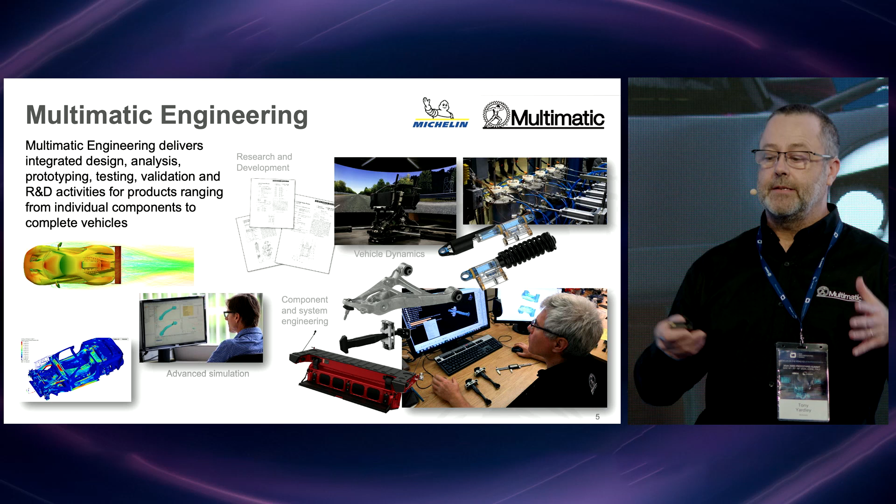Multimatic, just a brief introduction. The company is based in Toronto, Canada. We're a medium-sized company that is a tier 1 supplier to many manufacturers throughout the industry. That's the business base, and then Michael, myself, Behzad, we work in Multimatic engineering, which really facilitates the development of our products.

We tend to be very focused on the performance vehicle side, so we'll be talking specifically about high-performance vehicle in this presentation. But this section of Multimatic specializes in damper technology, active and adaptive dampers, which have been released into production quite recently.

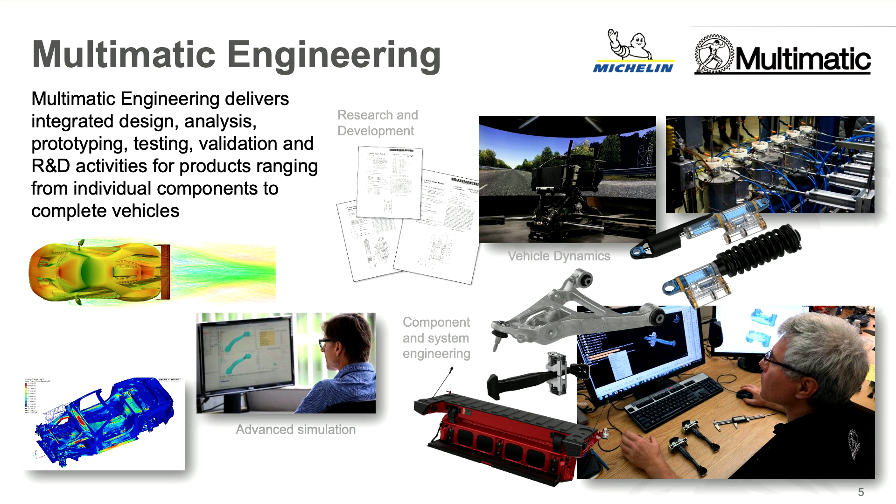So in terms of the project scope, we're going to focus on one vehicle, which Michael will detail. But we take, with Michelin's integral involvement, one of their highest performing road tires, and with them develop it specifically in a bespoke manner for the Mustang GTD supercar, I guess, would be the best way to describe it.

Then we're going to show how we used Cosin's FTire to predict some of the critical accelerations and forces going into the body structure that's going to be necessary in our ability to evaluate secondary ride and NVH. We'll detail how that FTire model is populated, and then on the bottom row, we'll be looking at how the real vehicle was instrumented so that we could validate this process.

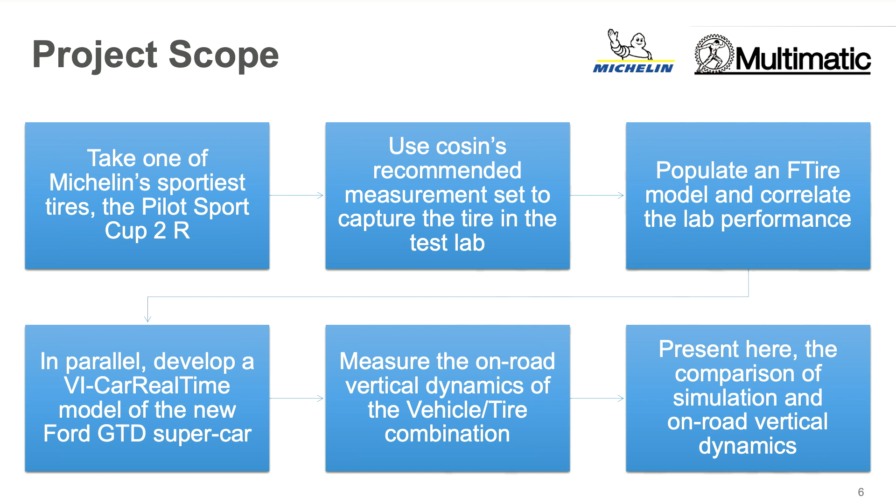We'll go on to essentially present the key results. So without my further waffling, I'll continue.

So I'm not sure FTire really needs that much introduction. I think most people will be familiar with it. But in comparison to a single point follower tire model, which is on the left-hand side of the screen, it has a distributed contact patch with a structural belt model. The important thing for us is that it runs in real time on the DIM 250 simulator that we have in Novi, Michigan.

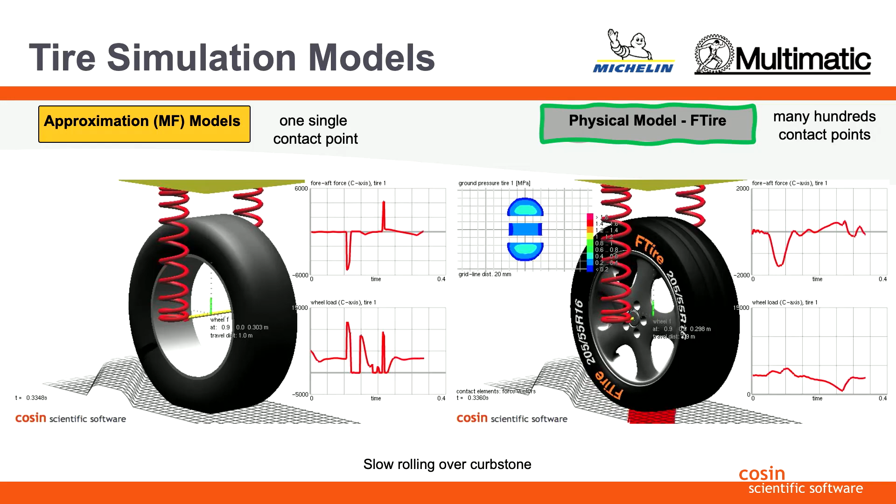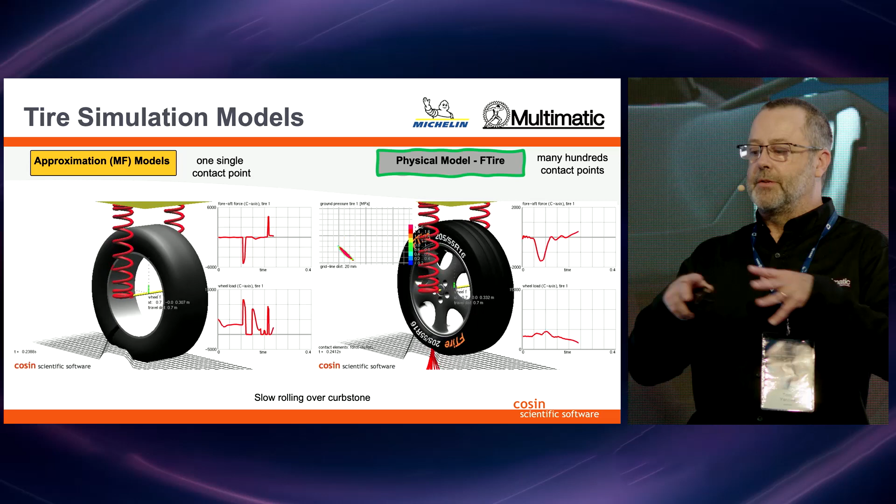What you see here in the presentation is a slide that I essentially stole from Cosin. It's their slide. But the way that the point follower tire on the left, the 4 spikes as it goes over the sharp object, is unrealistic. FTire models the way that the tire envelops the different contours of the road.

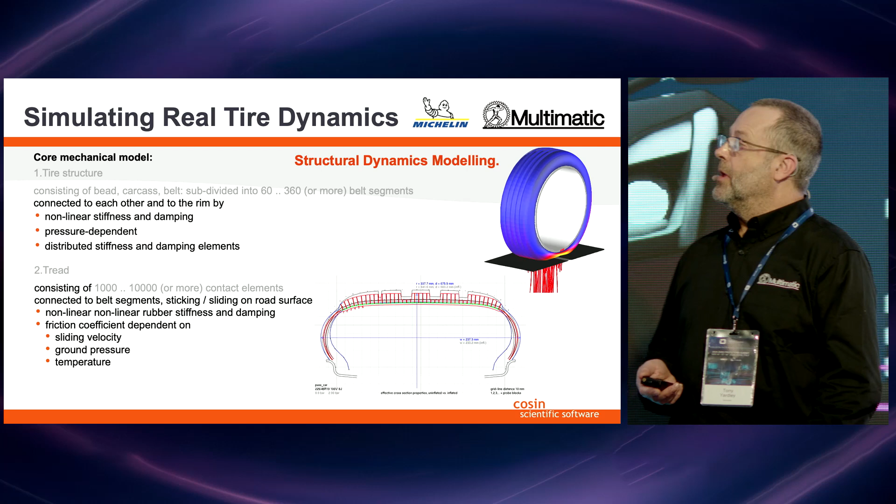Bit more detail about FTire. When we're running FTire in real time, we essentially break the tire down into a series of smaller chunks. We run at the lower end of the segment count. I think it was 60 segments around the belt. And ideally, we'd like to run more. As the computing improves, we would run more and get higher fidelity, and we'll see where we are actually trading off a little bit of NVH performance.

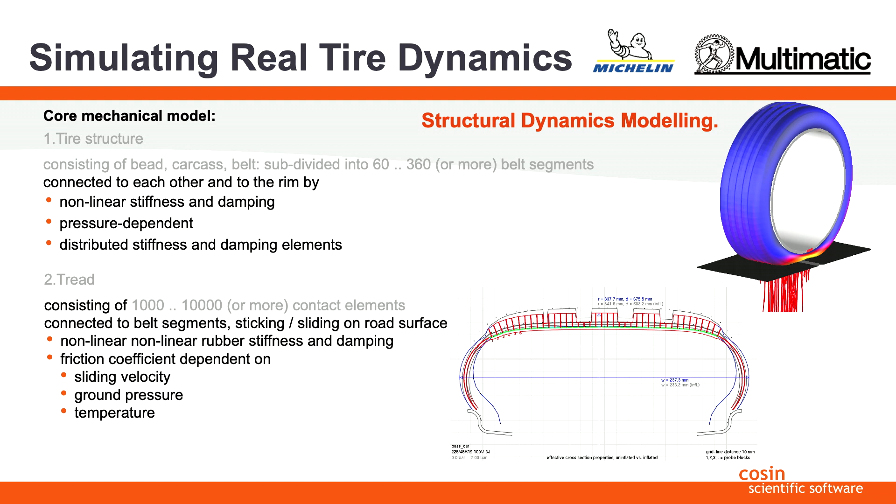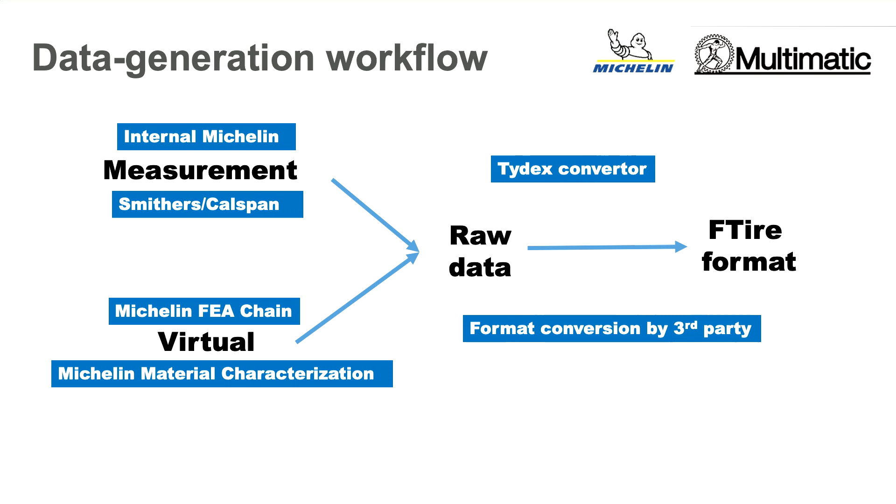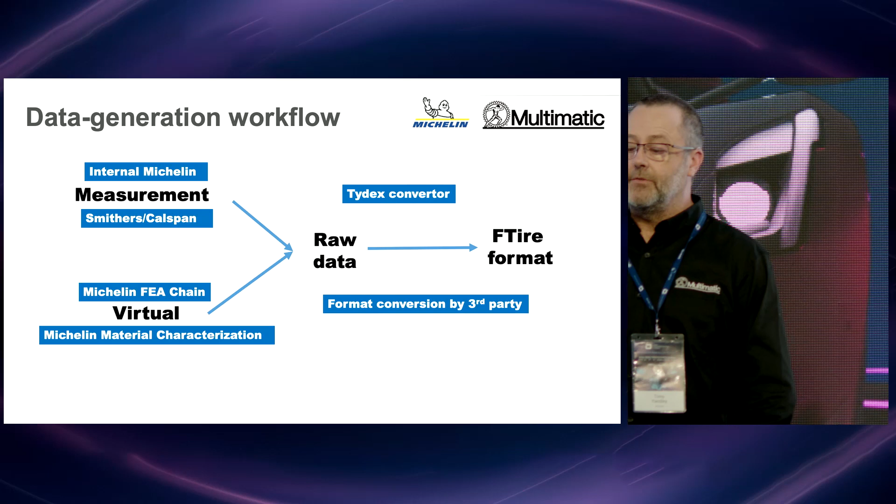The process that Michelin went through, it's kind of interesting. Cosin specify how to characterize and populate their model. So there's basically a series of in-lab measurements of the tire, and in addition an FEA structural model, that comes together into one single FTire format model that can be used for many things. One of the advantages of FTire is that you have a single model and it is applicable in many different situations. We're only using a fraction of its potential in this presentation.

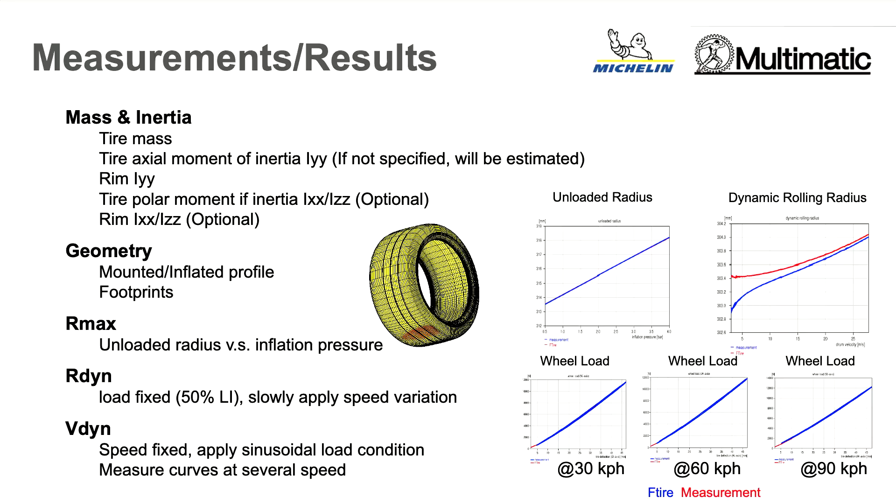The one plot where it doesn't match, Gary told me that's generic data from the brochure. He didn't have that plot available. So that one is the one that looks like it doesn't correlate very well, and it's because it's not real data.

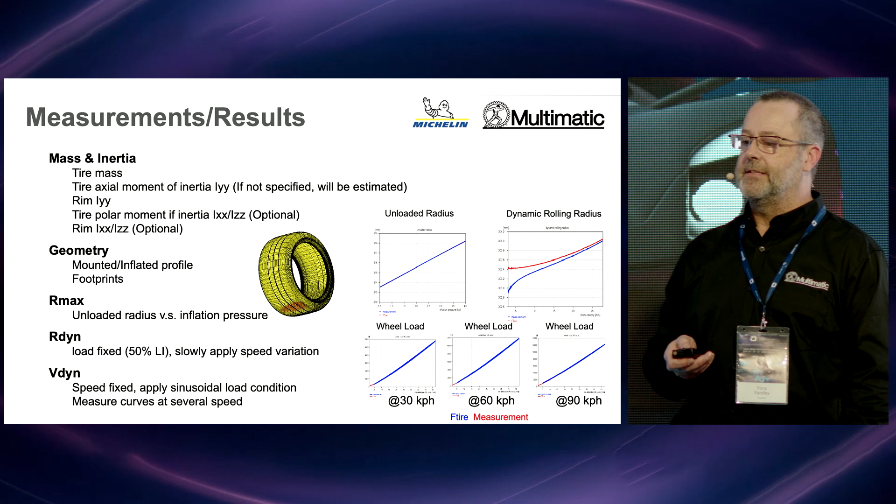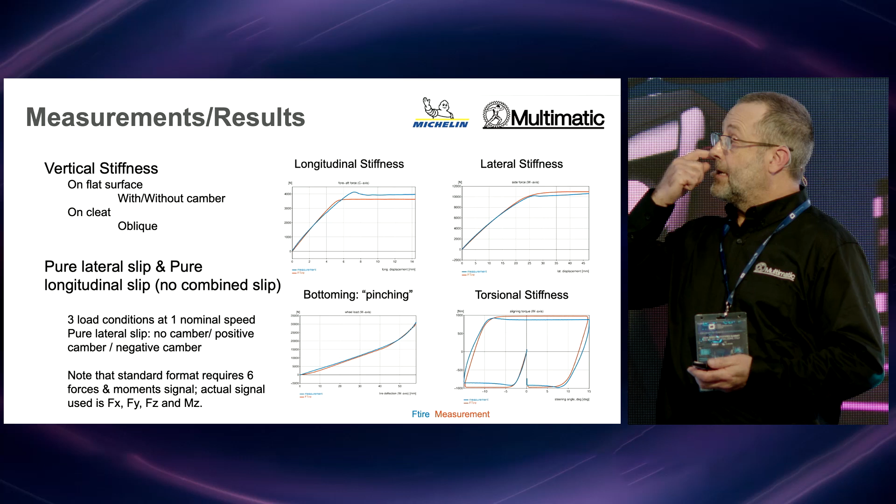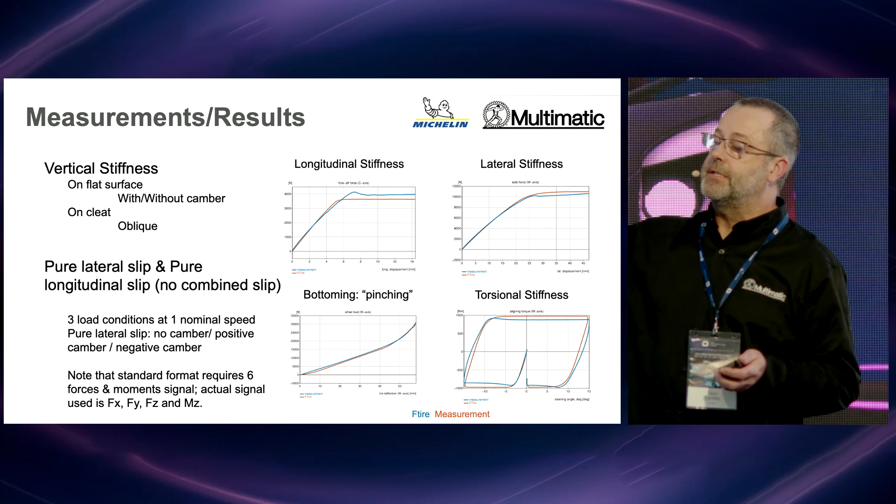Getting on to the more dynamic events, using a belt with a cleat, the tire rolls over, and from that, a longitudinal stiffness, and also by skewing the tire, a lateral stiffness of the tire is modeled. And here, again, the comparison: blue is measured, and red is the FTire model. I think the fit is, I'd say, a work in progress.

The bottom left plot is a vertical stiffness as it pinches against the rim on a very high load. And then the bottom right plot is from a static steering test, showing a significant hysteresis loop that is reasonably well reproduced.

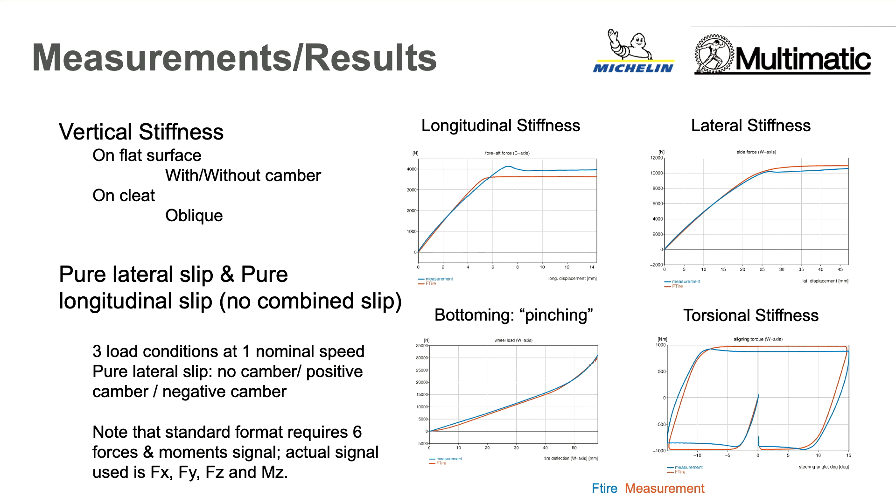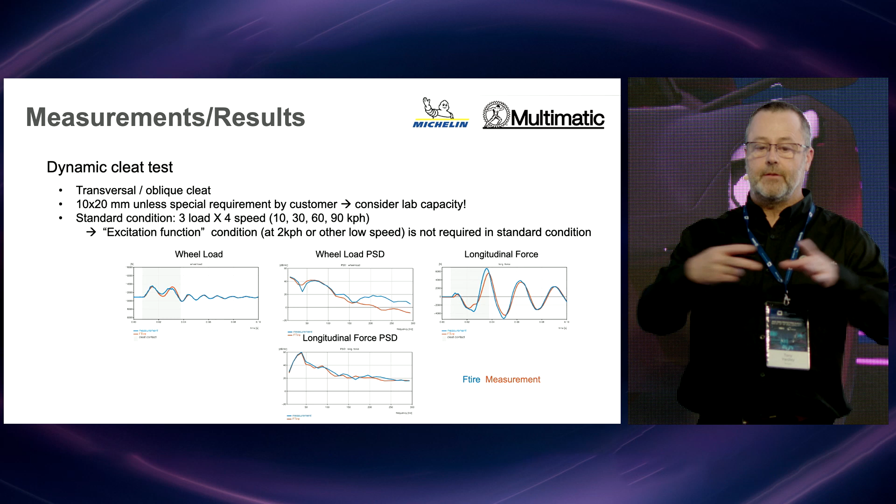Probably the most crucial characteristics for us are the transient vertical responses of the tire. And again, this is done by driving over a cleat object. Let me explain some of the plots. The gray section is where the tire is actually in contact with the cleat. And then, again, the blue is measured. The red is the FTire model. Far left is the vertical load.

In the middle top is the PSD of that vertical load characteristic, so looking at it across the frequency range. And then far right is the longitudinal force, again, as it goes over the cleat. Interestingly, I was surprised how long the longitudinal force still fluctuates after you've gone over the cleat. That was kind of surprising to me. And then lower down in the bottom, we have the longitudinal force PSD.

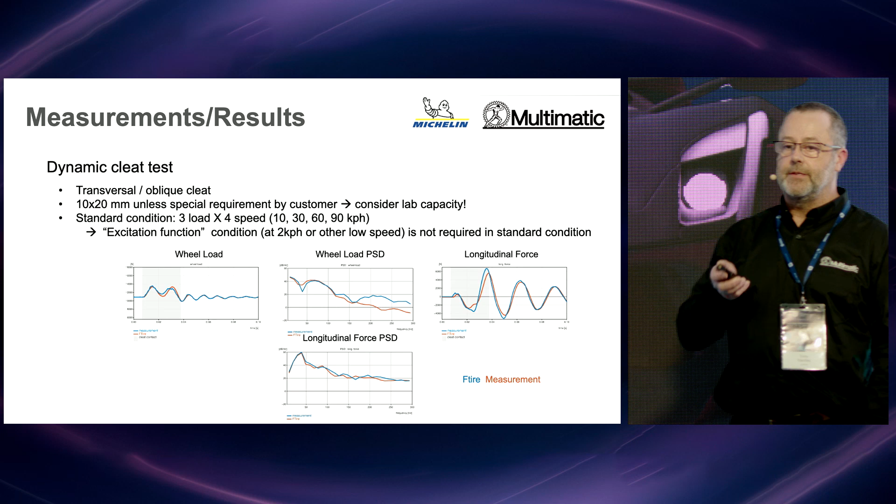The one interesting thing to note here is that in the top middle plot, the scale is really hard to read, and I apologize for that. These were taken straight from a printed report. But the blue and the red match reasonably well up to 150 hertz and then start to diverge. And that divergence is, for our presentation, actually outside the range. But for applications such as Charlie's and Bentley's, it's going to be crucial as well.

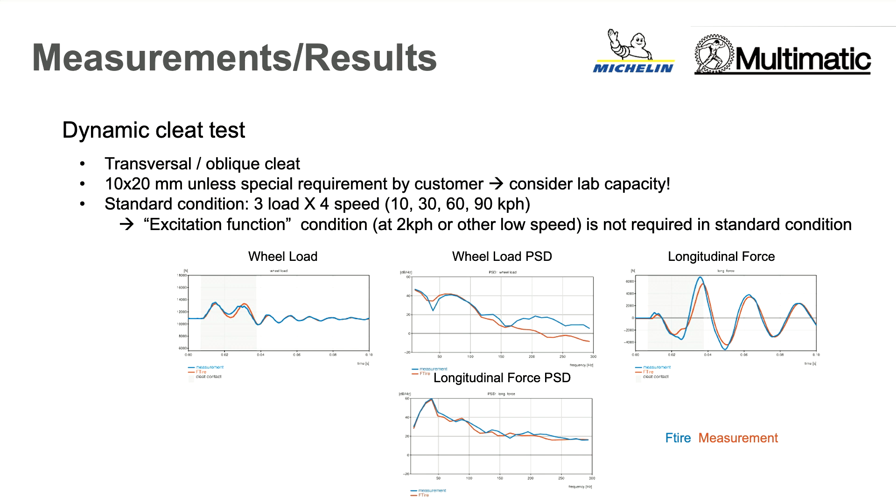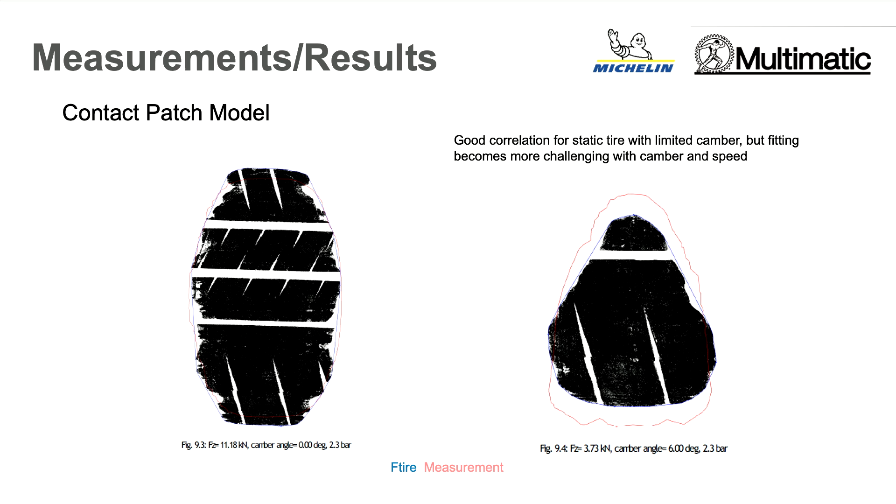The contact patch is specifically modeled with FTire, and the model fit, it's actually quite hard to see the outlines. The black is the actual measured contact patch, and then blue and red is again measured and FTire. The blue basically outlines the black area, and then you may be able to see the red.

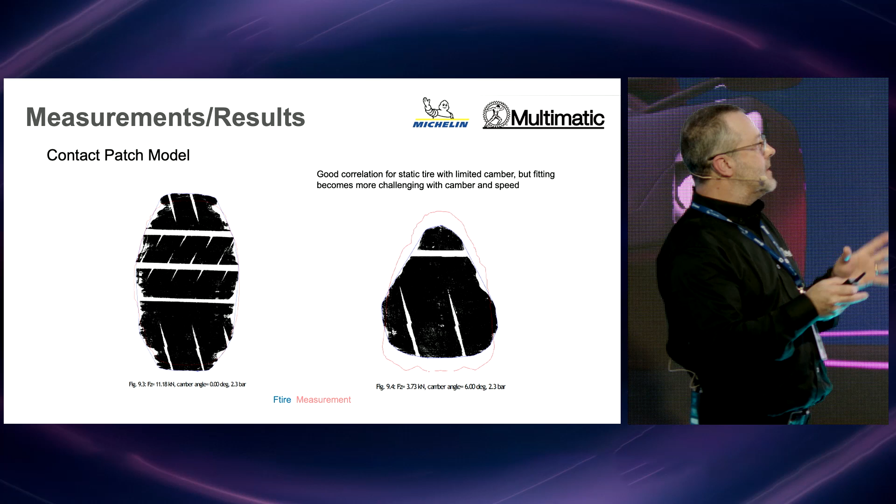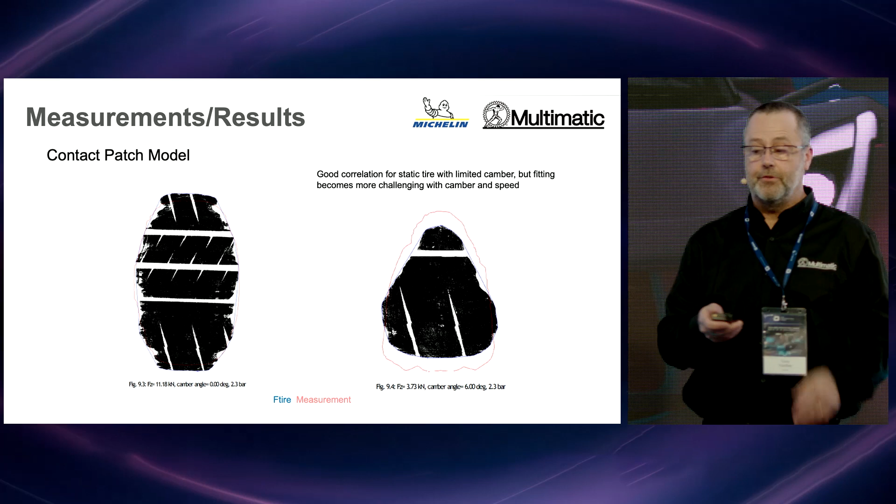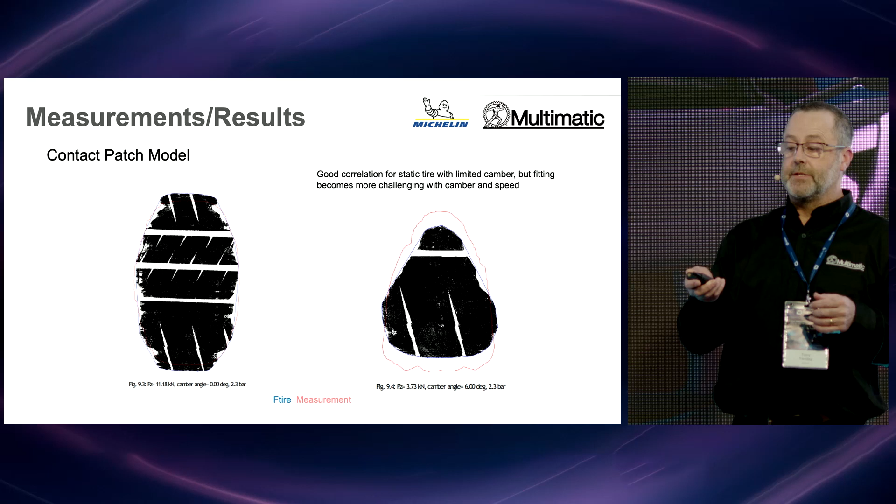The basic picture here was that at low speed, the match is really very good, and then as the speed increases, the difficulty of matching that contact patch increases considerably, because the time that the contact patch is actually touching the ground is very short. And that relates back to our 60 segments in the belt. If we could have more segments, we would be able to reproduce it to a higher speed.

And then probably near and dear to driving enthusiasts' hearts is the lateral force and aligning moment characteristics that affect on-center steering and performance driving. Here we see good side force reproduction, but in the middle plot, the aligning torque is significantly lower in the FTire model than we see in the measured data. Again, blue is measured and red is the FTire model.

We understand that this was a direct trade-off between matching the NVH characteristics and being able to develop the full aligning torque. I wasn't involved in that process directly, but I know Benny, sat over on my left, whose input we greatly appreciate, would be able to discuss those at length, I think.

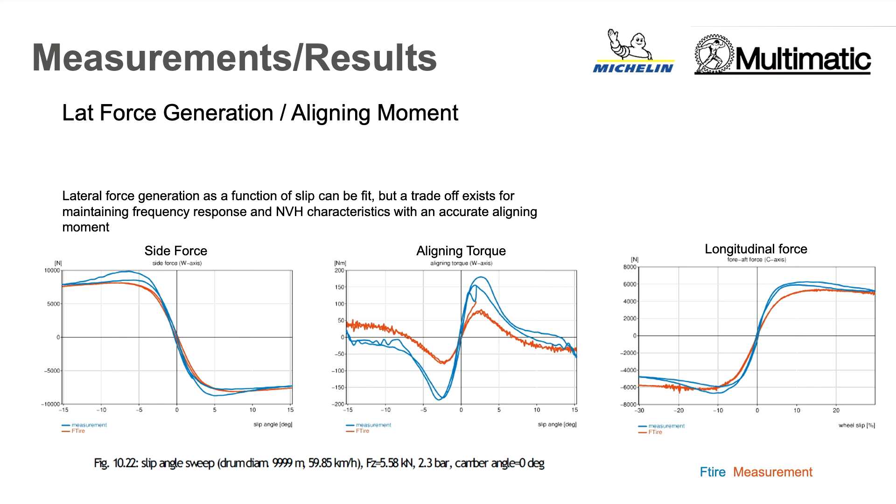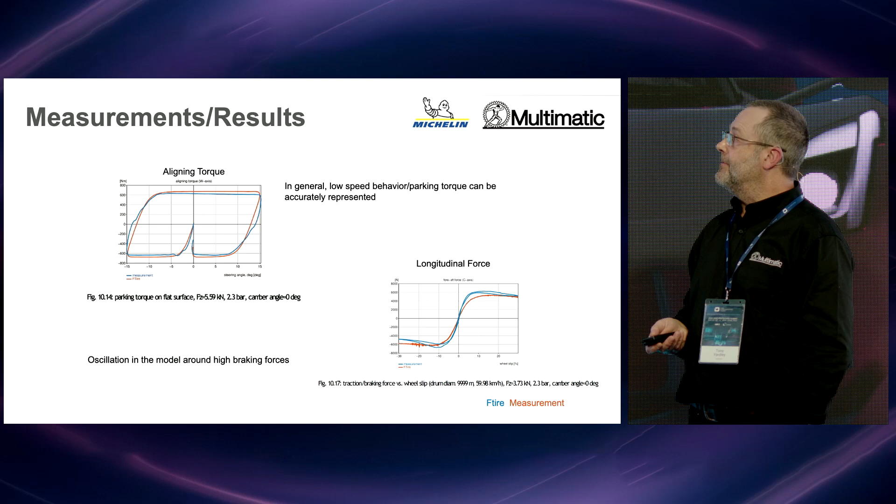And then we've basically seen the aligning torque during steer on the top left, and the longitudinal force is also a pretty good match. What's the comment there? Oscillation in the model around high braking forces. We did see some oscillation, again, kind of in the contact patch behavior around that frequency. So that is an area that we'd like to refine. We probably need more compute capacity to do that.

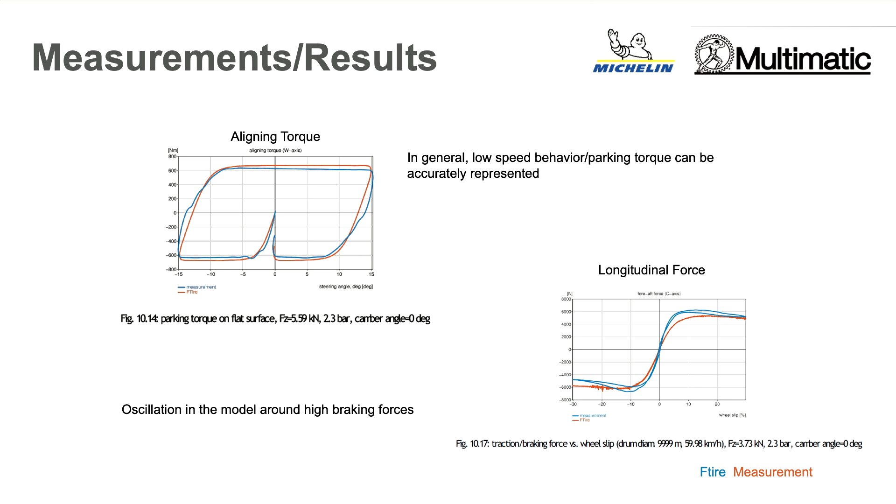I'm going to hand over to Michael now, and he will detail some of the full vehicle information.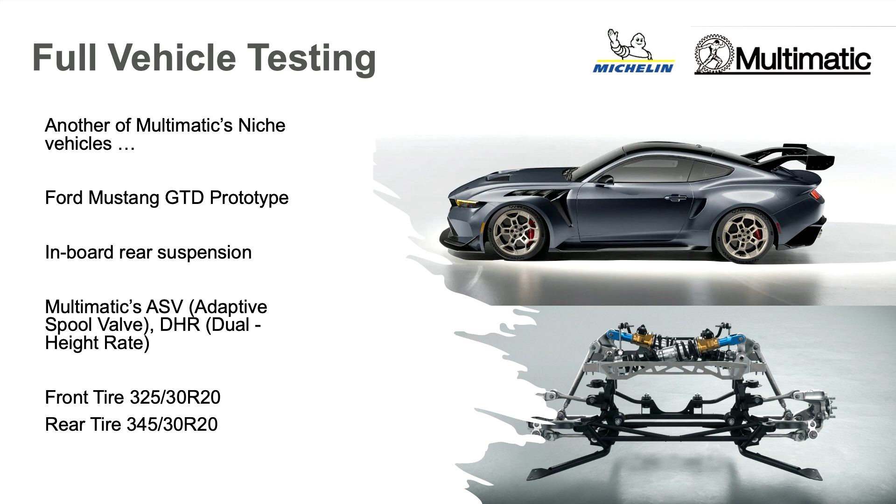Yep, so this is a slightly more exciting topic. As you can see, this is the car we're testing this all on. It's a Ford GT prototype, or Ford GTD prototype. One of the big complex parts is the inboard rear suspension, which added a lot of pre-processing and post-processing to all of the data. It's also equipped with Multimatic's ASV and DHR system, dual height rate and adaptive spool valve. In addition to that, it has absolutely monstrous tires with a 325 front and a 345 rear.

Those tires are Pilot Sport Cup 2Rs, as we were talking about before, kind of the best in class for on-road performance, but also on the racetrack. Very good, very sticky.

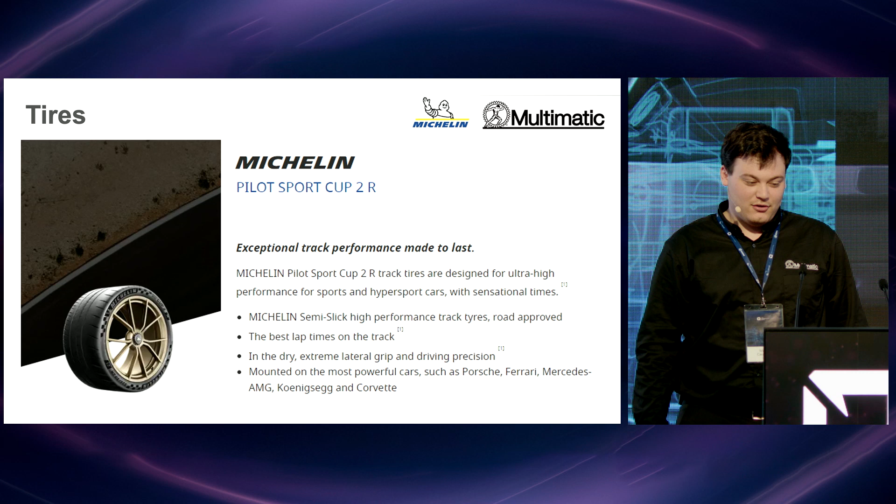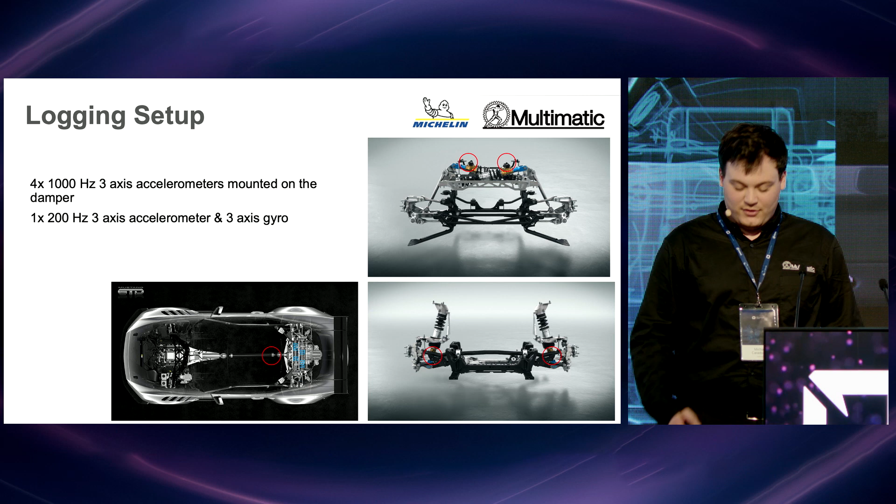So how we set up the loggers. Each damper had a 1,000 hertz three-axis accelerometer mounted straight to the damper, which on the rear is not in line with the hub, so that took a little bit of post-processing to fix. And there was also a 200 hertz three-axis accelerometer mounted basically right behind the center console, which is also a gyro.

So you might be wondering, what kind of road are we driving this on virtually, and the digital twin in real life? So it's a Michigan ride road. It's normally a really bad Michigan road. Has a lot of big concrete patches.

They create a lot of secondary shake. As you can see here, we've modeled it twice: once as a road mesh, once as a grid mesh. It's a little hard to see, but the grid mesh is a much finer density, 1 centimeter mesh spacing, which compared to a classic road mesh being essentially ten times that, is very high density, and that would more accurately reproduce the shake that we were experiencing in real life.

This is all generated from a point cloud scan, as you can see on the left here, and the location of the road, and also some close-ups of the sections that create a lot of the shake. It's kind of the buckling of the concrete slabs that create a lot of those really aggressive shake motions.

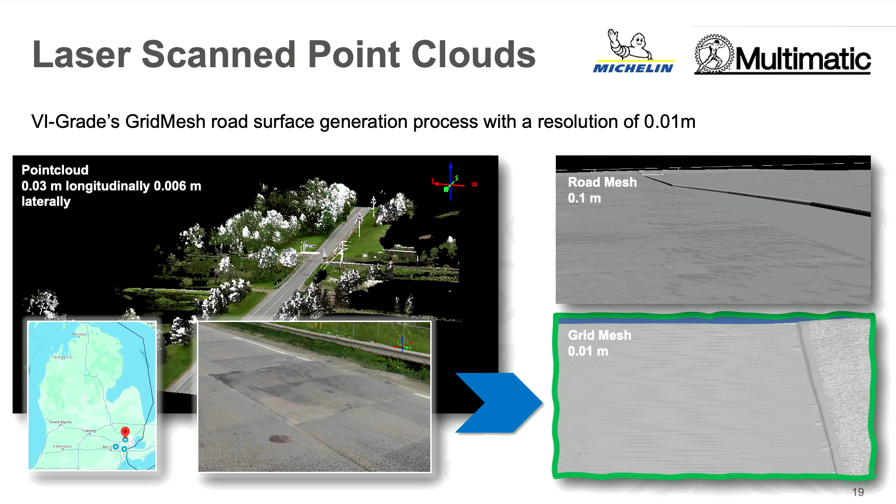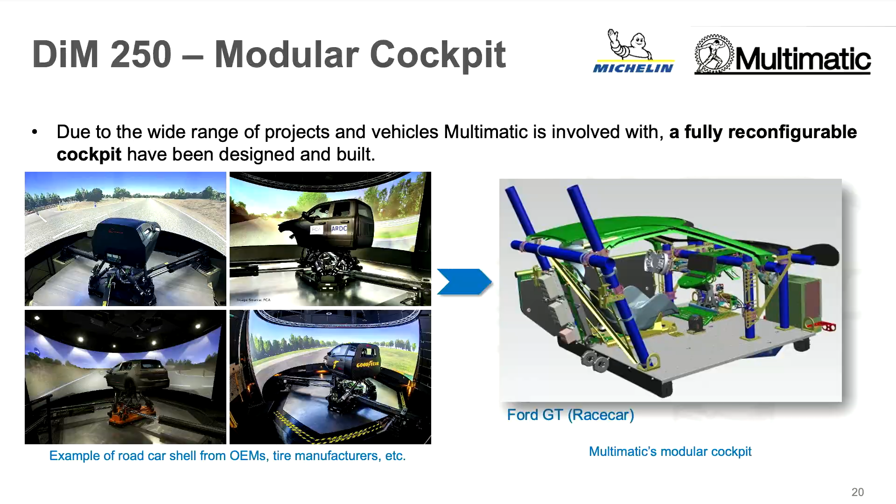So our cockpit, as you can see, and as you may know, a lot of the VI-grade simulators have cut car cockpits. Well, with our needs being to switch between a Mercedes C200 to a Ford GT to a Ford GTD, we can't just have a cut car because we'd be swapping cockpits all the time. So we have a fully modular cockpit.

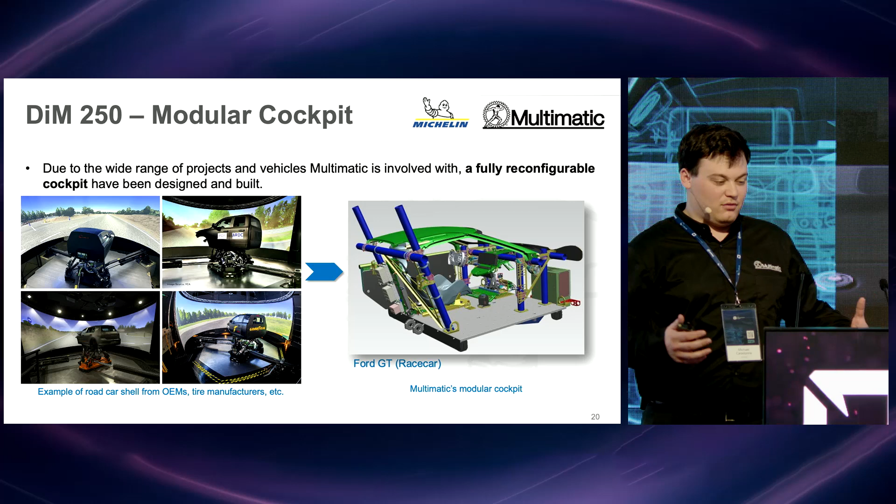Right now it's set up in the Ford GT Mark II configuration, but within 2 or 3 hours we can switch that to a C200 or some LMP2 car otherwise, which has been a very big step for us to be able to include all of our potential development opportunities.

So to run this real time, it was a little bit of a challenge for us. Here's a little bit of our computer specifications. So the biggest addition to running it real time was to have one core dedicated per tire. Nothing else on that core. Each core has its own tire.

And then some FTire settings pointed out by Cosin, run it in real-time mode. And then we ended up reducing the number of tire states from 30 to 15. That step was the final straw in being able to run it real-time. So I'll hand it back over to Tony to talk through some of the results.

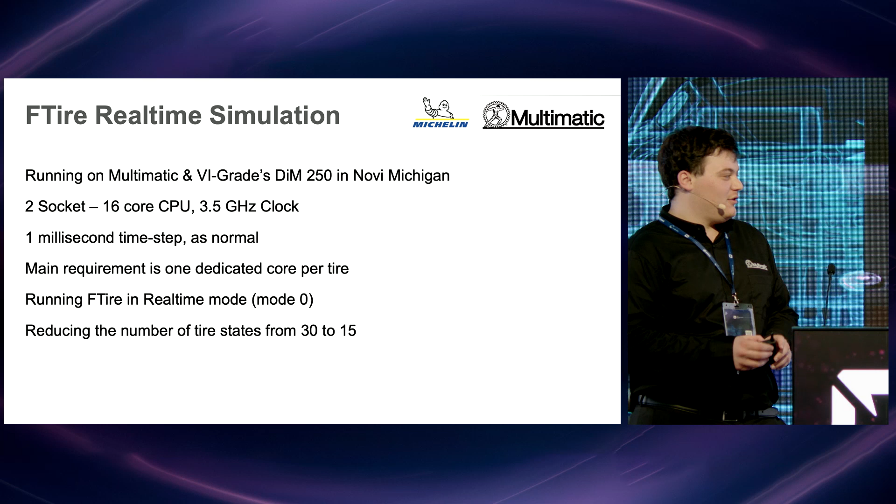Yep, thank you. So really just to close out, I've got 2 more slides. I am going to go through them in some detail. So I hope you're all brushed up on your frequency domain analysis. A show of hands, everybody good?

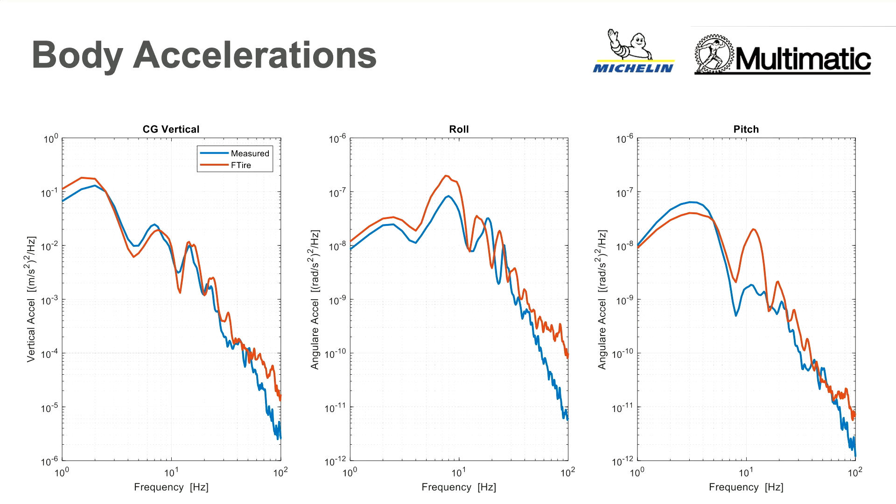is interesting. And the last plot on the right is vehicle pitch, so front to rear rotational accelerations. The one place where it really significantly diverges is right around 10 hertz, right in the center of the plot. That's a significant deviation, and we have to chase that one down. It's a bit too low for it to be flexibility in the mounting of the IMU. I tend to suspect something to do with phasing of the wheel hop modes, because they're right around 10 hertz.

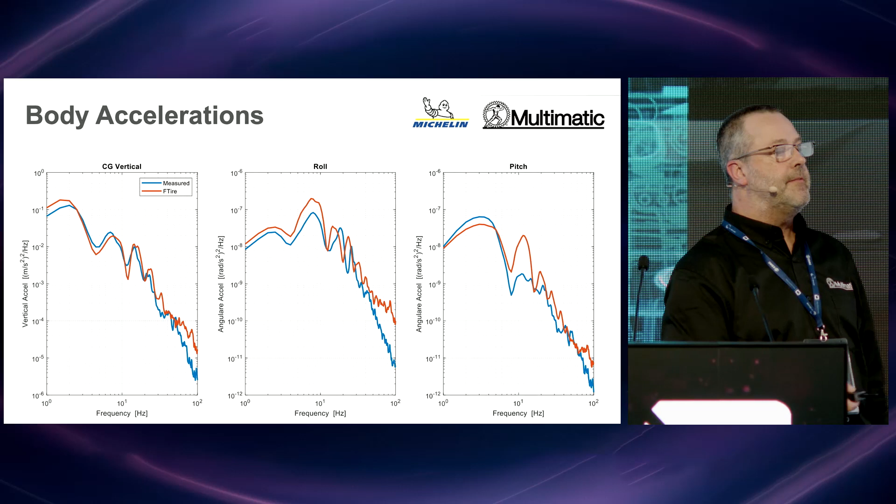But we'll see on the next plot some of the frequency content that's coming into the car. So this is kind of what the driver would perceive. So I think we're doing an excellent job for a rigid body simulation at this point.

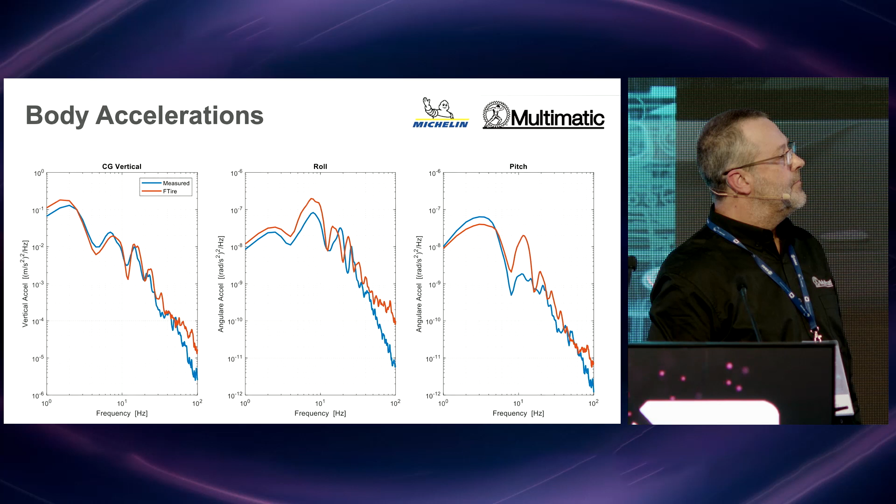And then the last slide is basically what the FTire is generating as forces, the dominant forces into the wheels and suspension. And I think the first two plots are the front left and the front right.

They're a good shape match. There's a little mismatch in the frequency. The peak frequency is just over 10 hertz, 10 to 15 hertz. We are a bit lower in FTire, so it probably means we have a bit too much mass associated with the front and unsprung suspension in the front compared with the real car.

And then the rear is a really good match. It's a little off at the very low frequency, 1 hertz. That's much more to do with our suspension model. We haven't had a chance to correlate the suspension unit on our 4-post rig, which we'll come to in next steps.

But probably the most interesting point from a tire modeling perspective, which is the FTire involvement, is right out near 100 hertz. It's actually 85 hertz. There's a big red spike, which is the FTire model, just in the rear tire, showing a large response, or basically a resonance. And we understand that to be a slightly underdamped contact patch mode.

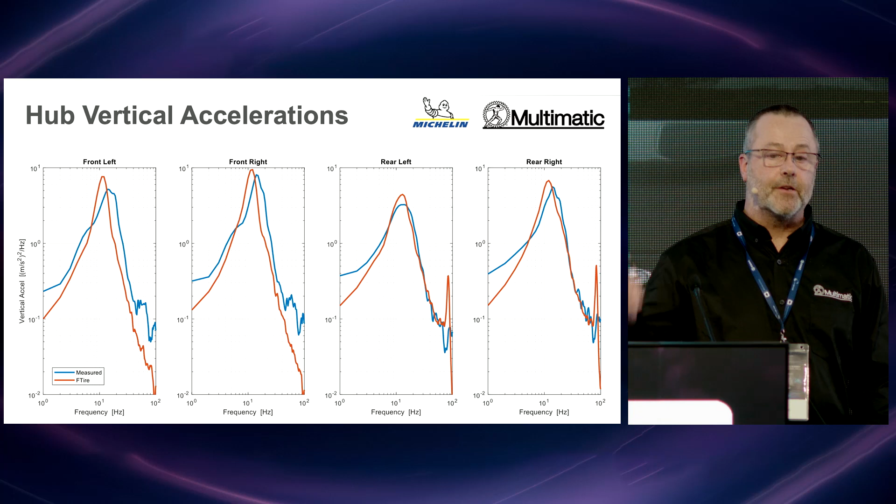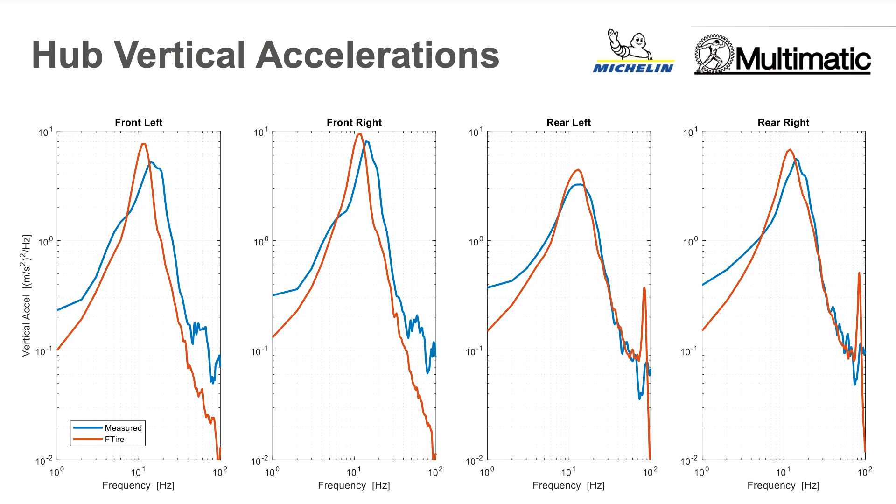And talking with our colleagues in China who did the correlation work, they were actually aware of that during the correlation, but traded that off against some of the other issues. So they went in favor of matching some of the static stiffnesses. What we're going to do is go around in another correlation loop now that we have this data to look at and see what is the most important aspect to focus on during the correlation.

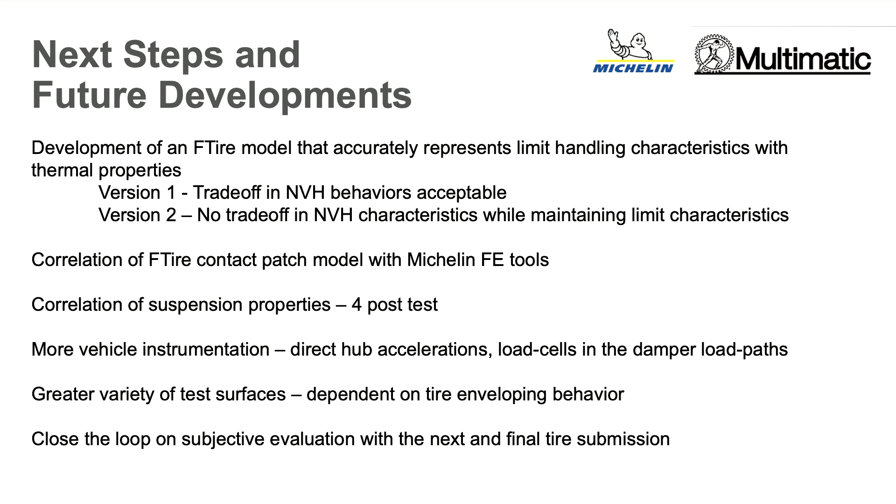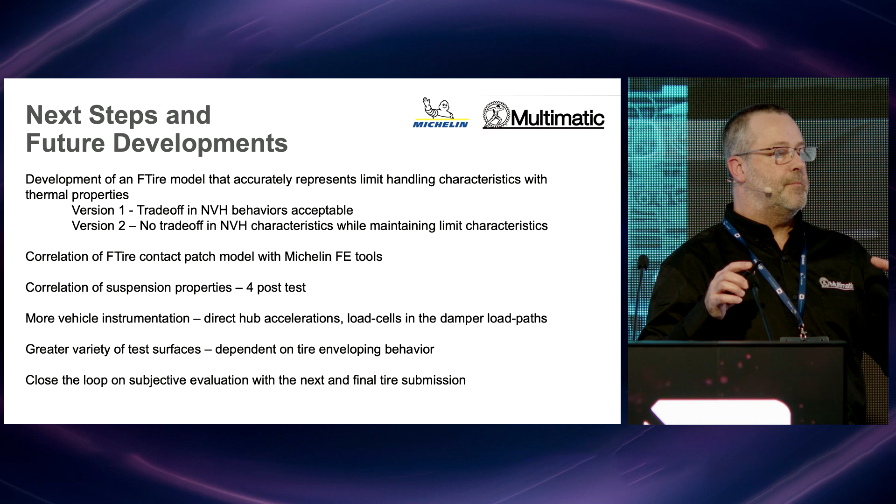So just to wrap up, our next steps are essentially continue development of the FTire model. We have a trade-off between the NVH behavior and some of the other behaviors. Version 2, which I understand is coming in July, would be the next improvement in the FTire model when no trade-offs are necessary. Now that we have this information, we can do a more focused job of knowing which characteristics we need to match during correlation of the tire model.

Then from a vehicle side, we would be using our traditional 4-post test machine, essentially a lab test for the full vehicle, to correlate the suspension, particularly the friction, which is a tricky thing to know ahead of time, which is why it's not particularly well accounted for in our full vehicle model at the moment. And we'd like better instrumentation.

We only had the car for 3 hours. It was the first prototype, thin on the ground. We only had it for 3 hours, and it was shipped off back to Canada. We'd do a greater variety of surfaces that would include enveloping characteristics of the tire. And when we have all that in place, we'll be back on the DIL with a subjective comparison between on-road performance and off-road. So that's pretty much the end of our next steps. And that brings us to the end of the presentation.

If there's any questions, we'd love to pass you over to Cosin. No, seriously, we can answer any questions if there are any questions. No? Thank you for the time. Thank you. Oh, we have one question. Can we have a mic?